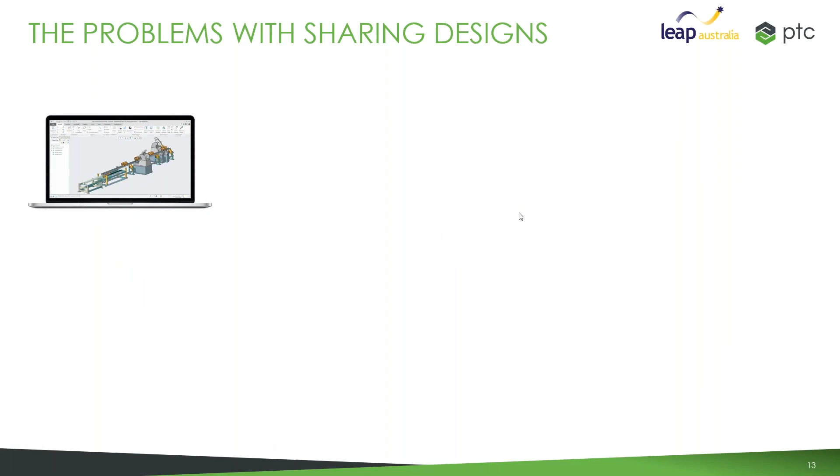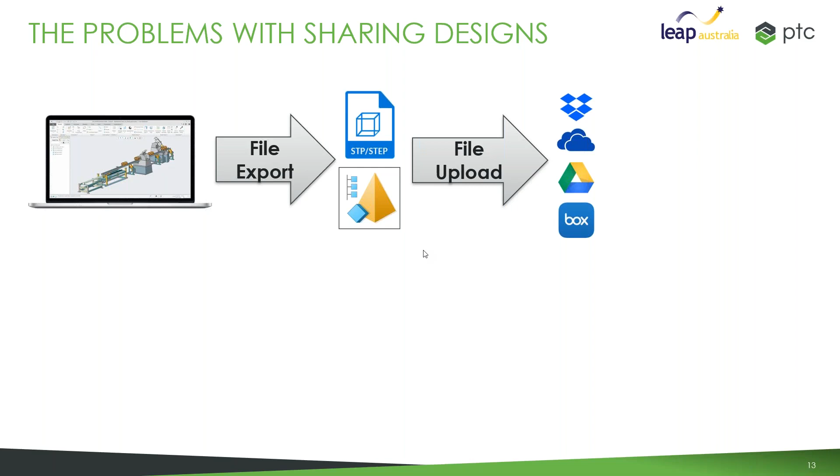So usually we start off with our 3D CAD. We're required to export this file out if someone wants to use it. And then we're faced with, well, what kind of file type do I actually need? We have to upload that file, whether we're using cloud services, local storage areas and so forth, and then eventually share that out to the individual that we want to have view this information.

So with that, we have to determine, well, can the end user actually view the file? Like numerous scenarios I've encountered where they don't have access to the software, they're not familiar with it, and you're spending a lot of time trying to troubleshoot issues that shouldn't really be there if you're just trying to get feedback on a design. And then there's things like IP.

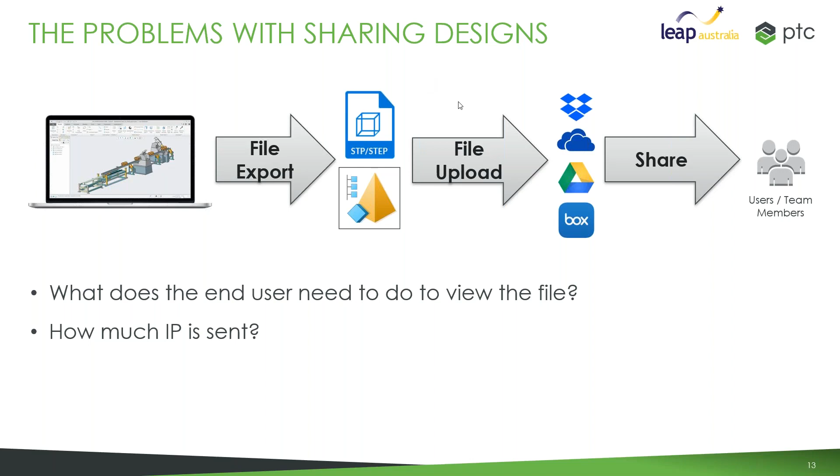So if we send out a 3D format, do we want them to have a physical copy of this file? So even things like a STEP file where it's pretty much stripped back from any model information, it still allows us to reverse engineer. We still can do measurements. We can still review a design and make judgment on it. So do we want to be sharing that out with people within our organization and outside of our organization?

And then do the end users actually understand what they're looking at? So there might be non-native CAD users. They look at something, they don't know how to manage the software or drive the software, and they don't get a full understanding of the context of it and how it fits into or how it should be used.

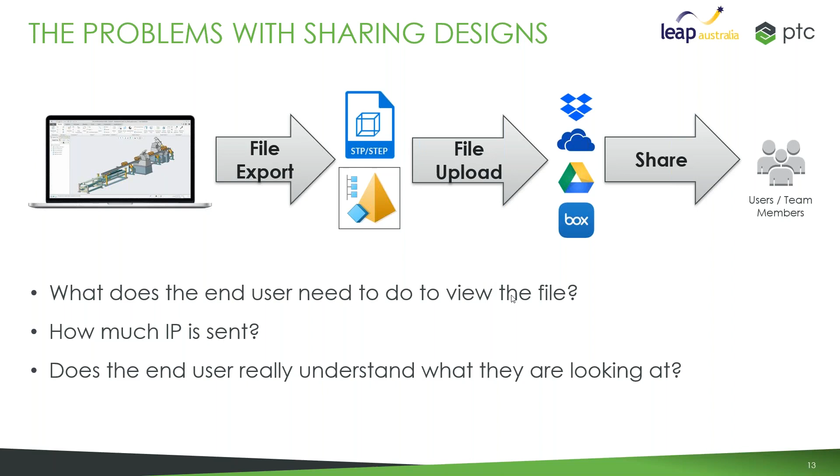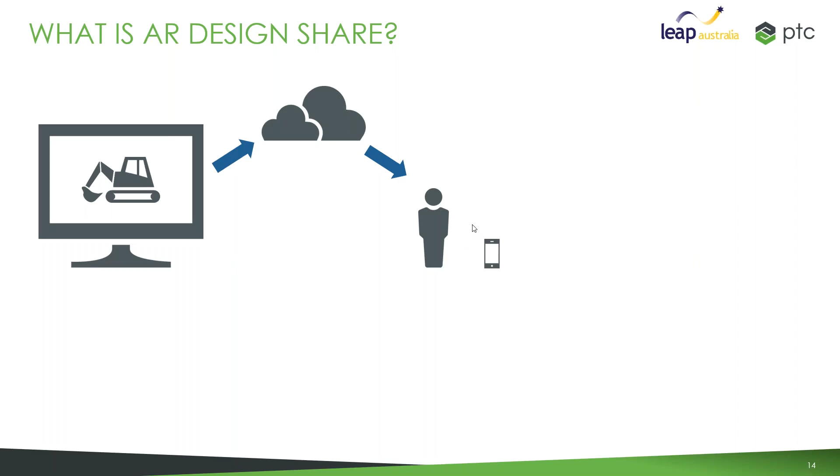So this is where something like AR Design Share can actually come into play. So we start off with our 3D CAD geometry, and we effectively publish this out to a cloud service. From that, we can share this to individuals to view on both their phones, tablets, or eyewear at one-to-one scale.

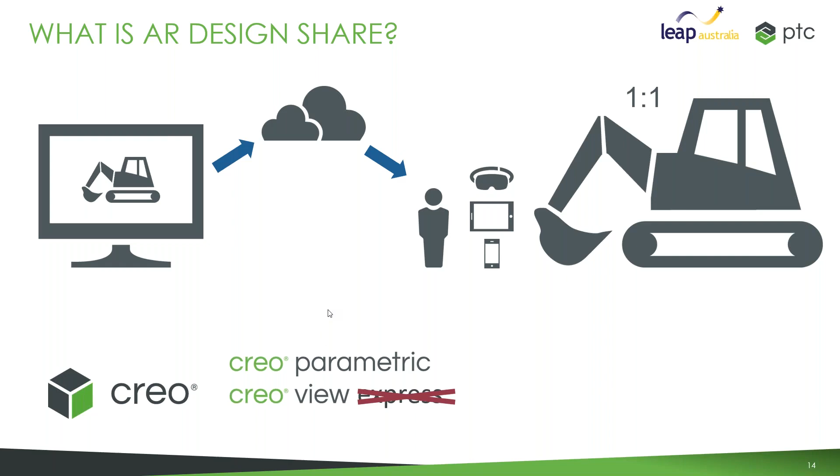So the important thing here is that AR Design Share is across the Creo suite. So effectively, we can use it within Creo Parametric itself. We can use it within Creo View in the Lite version, MCAD, ECAD, but not Creo View Express. So that's the free version that's available, as well as Creo Elements Direct. The other thing to note is it's also compatible with Windchill, so we can publish out straight from Windchill to share out these AR experiences.

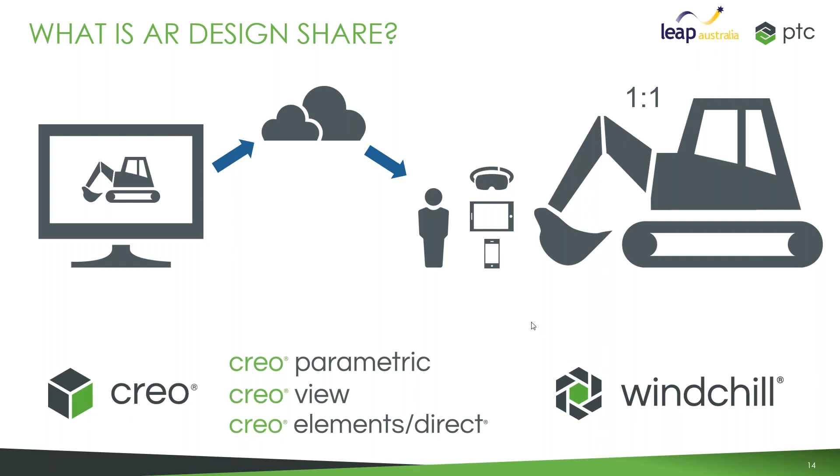Okay, so accessing AR Design Share from within Creo Parametric itself is simply within the ribbon. So we have to firstly define what's known as a model target, and we'll explain a bit more about that, and then we simply publish and we can go through and manage it.

So from here, it's very easy to quickly create and publish, distribute it, and then manage these experiences to make sure that the individuals accessing them are those that you wish to access them. Or you can make it public and then anyone with the QR code, URL link, etc. has access to it. So it allows for very easy and effective collaboration.

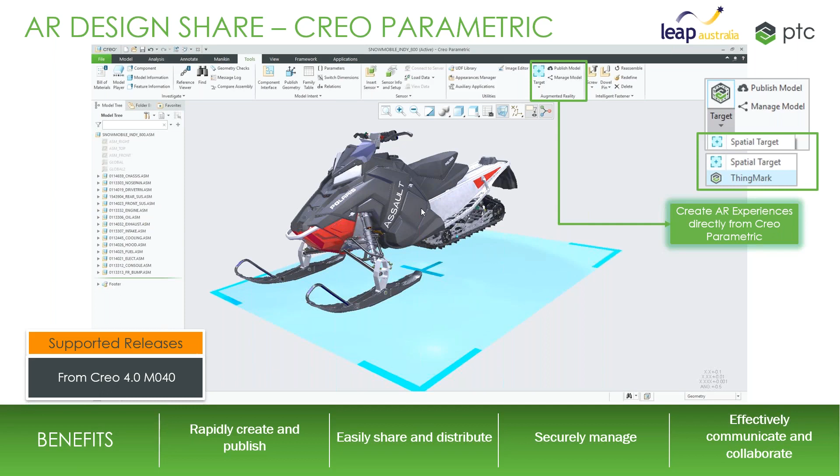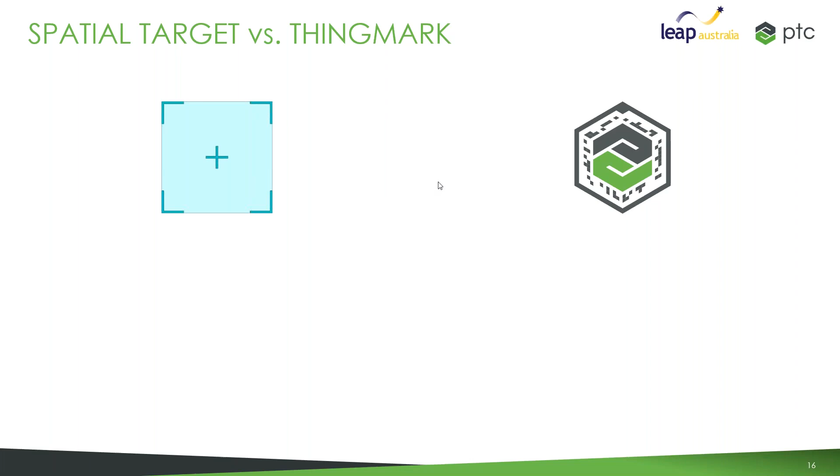So next thing is the two types of targets. So within Creo Parametric or AR Design Share, we actually have spatial and ThingMarks, each with their own pros and cons. So the idea is that a spatial target is used on a horizontal surface. It's used with a compatible device. So it's not really an issue in today's climate where technology is quite advanced, but we do see that in some scenarios.

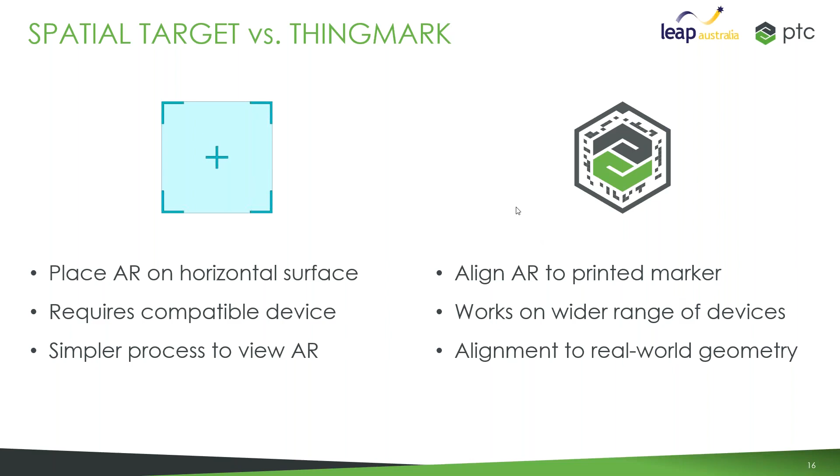ThingMarks are more used in applications where you might want to have it vertical on a wall. Because you have a physical marker, you can actually place that on a vertical surface and project your AR in that form. It's available to a wider variety of devices, and it also allows you to position your AR specifically in certain areas. Okay.

AR Design Share itself allows you to create up to 10 experiences. So this is in the out-of-the-box solution. There is also an enterprise edition, which gives you up to 50 experiences. There's two access modes, both public and restricted.

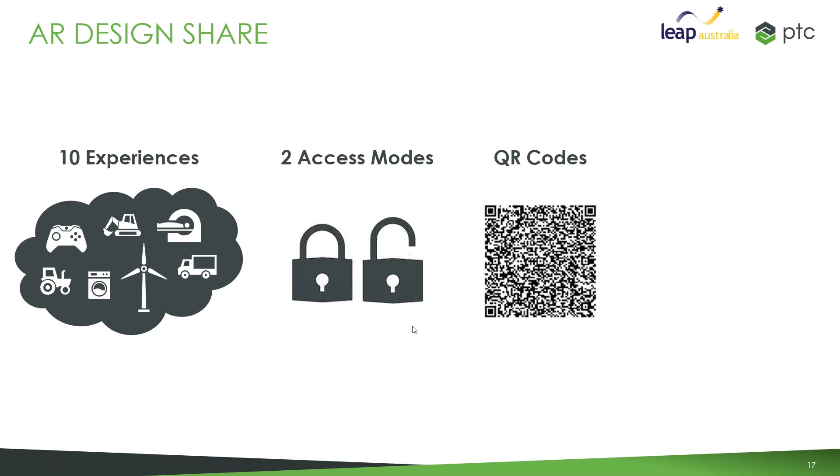So you can lock down who is viewing and who has access to this information, as well as distribution of QR codes, allowing you to view the experience within Vuforia View on any device, whether it's mobile, tablet, eyewear. And then lastly, the ability to use HoloLens, so wearable devices, to view the experiences.

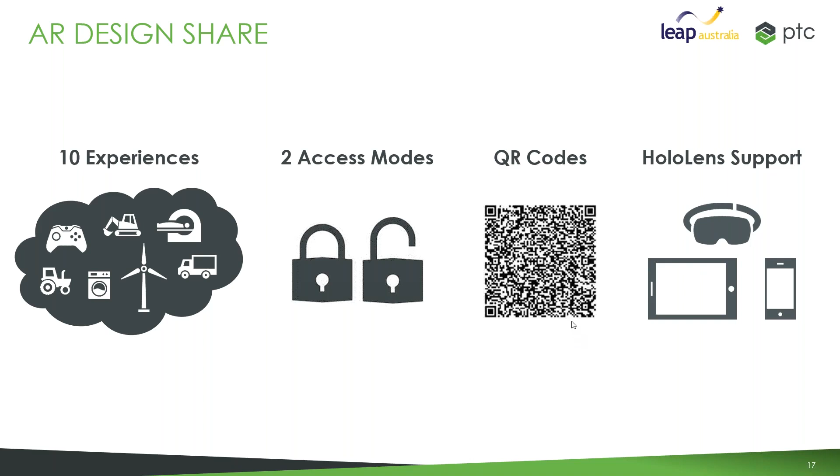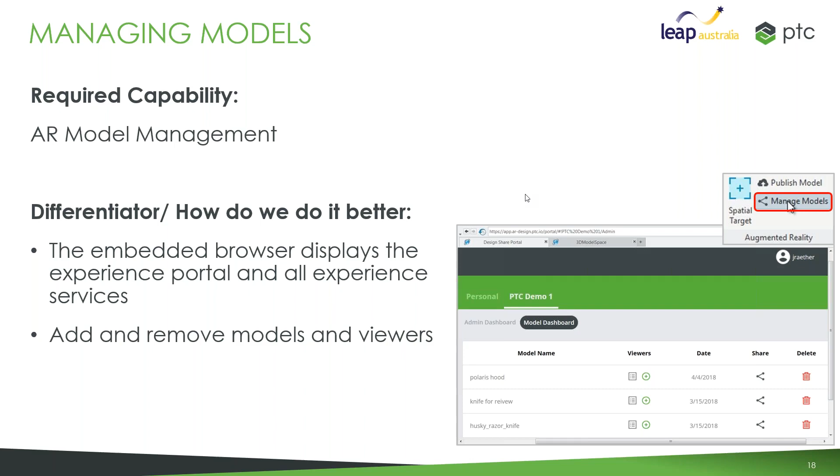So managing the models, we simply can go ahead and manage them depending on if we want to set certain preferences, we can go ahead, delete out information. So we can go through and essentially keep track of what experiences are logged within our system and then go from there.

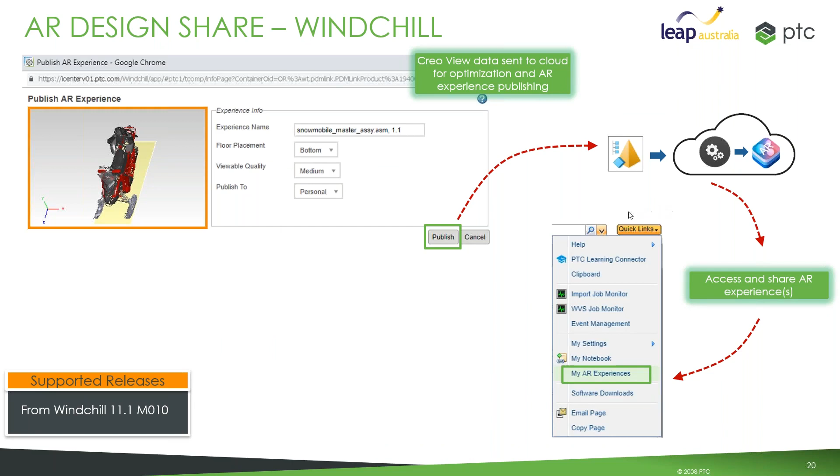Okay. So same thing within Windchill, simply using the actions dropdown. And then from there, we have this publish AR experience. We simply click on publish to publish it out to the cloud services. And then from there, we can manage it using the quick links dropdown, my AR experiences. So we can keep track of all of that right within Windchill.

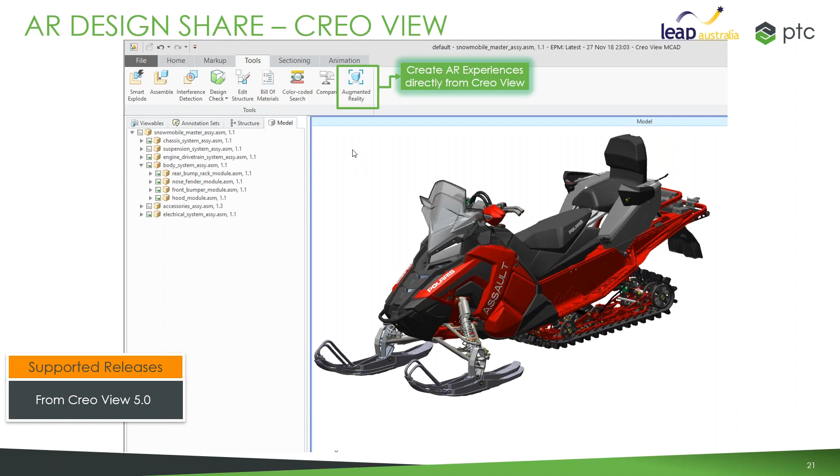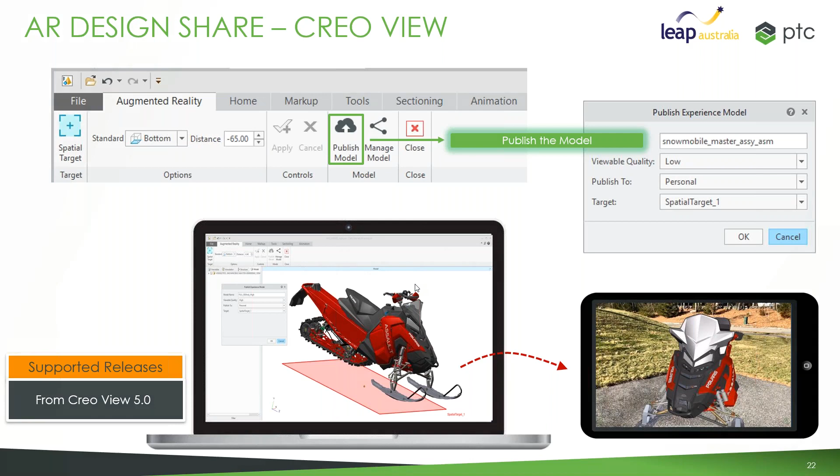And lastly, Creo View itself. So simple enough, same thing as Creo Parametric. Essentially the tools up in the ribbon, we're clicking on augmented reality, we define our spatial target and off we go, publish it out and we're ready to view and collaborate. Okay, so it's very quick and easy to go through this process. And what I'll do now is I'll just jump over into Creo and I'll show you a little demonstration of this.

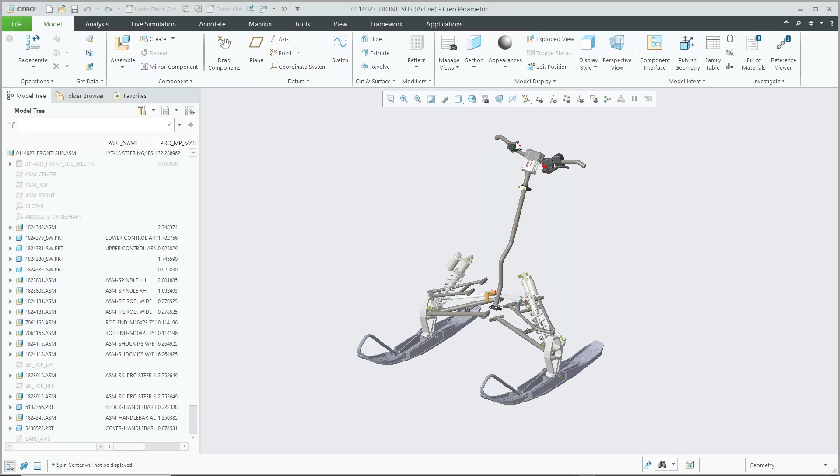Okay, so here we have the same model that we've been using across the webinar series. So this is a front suspension system from the Polaris snowmobile that you may or may not have seen in some Creo promotional videos and the stuff that we've shown over here at Leap. So what we want to do is click on Tools, define our target. So I'm going to use a spatial target, and then it's a matter of clicking Publish.

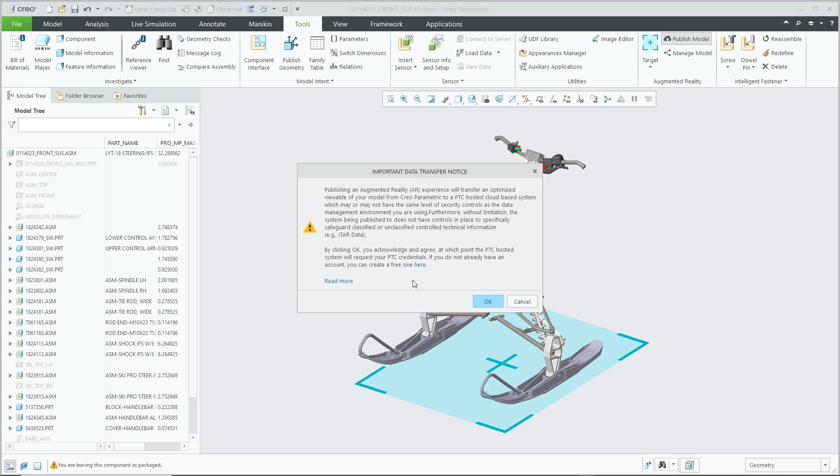So we have this pop-up, basically a disclaimer showing that once we publish our information, it's going to be housed on a PTC hosted cloud system. So this may or may not align with your security protocols within your organization. So just something to keep aware of. You also will need PTC credentials in order to publish this. So if you don't have one, you can simply click on the button shown here, and they'll take you to the landing page. You can fill out the form, and then you can start publishing out some experiences.

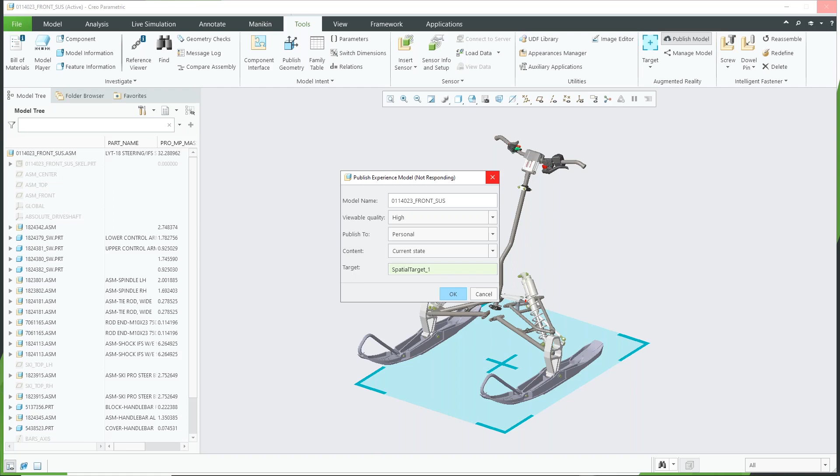So from there, it's going to get me to authenticate. Once I've authenticated, I can input some attribute information, whether it's the quality, where I'm publishing to, things like my name. I'm going to select on my target and publish it out. So we'll give this a second to load. And basically what it's doing is publishing out this information to that PTC hosted cloud service. And then after which, once it's finished, we'll jump into the Manage Model and we'll have a look at the finished experience.

Okay, so that has successfully published. So I'll jump over into Manage Model at the top, and we'll actually have a look at all the experiences that are published within my user account. So here we have front suspension. We can see things like spatial tracking or ThingMarks, and whether or not that's public or restricted. So what I'm going to do is actually share out this project.

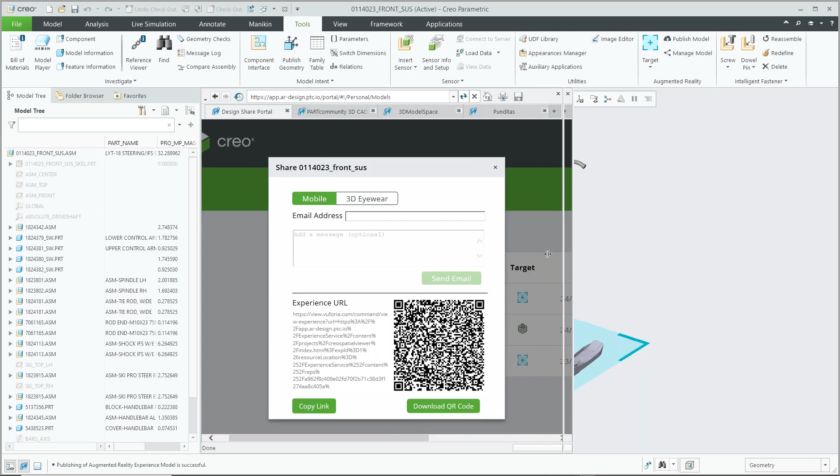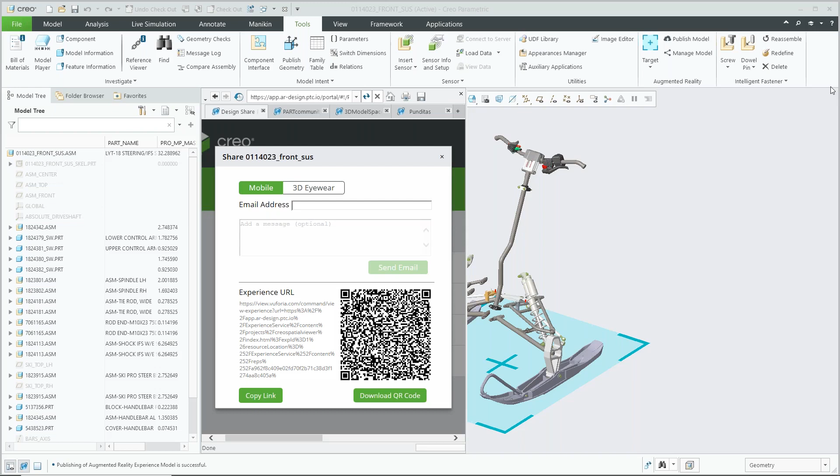I'll just minimize this. And for those of you that do have Vuforia View, you can simply scan this QR code. So what I'm going to do is bring up my phone. Just one second while it loads. Okay, so now this is essentially my phone. What I'm going to do is I'm going to hover over to my QR code, scan it. And then now it's going to ask me to position it on a flat surface. So I'm just looking at my desk, my mouse pad, and my design has been placed.

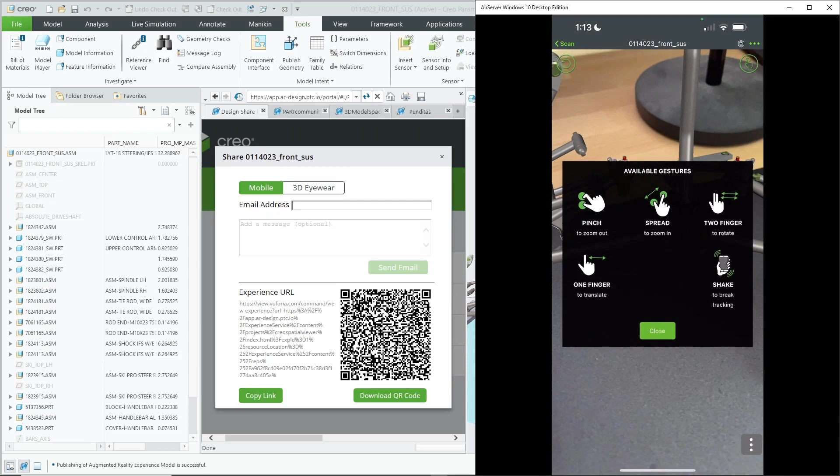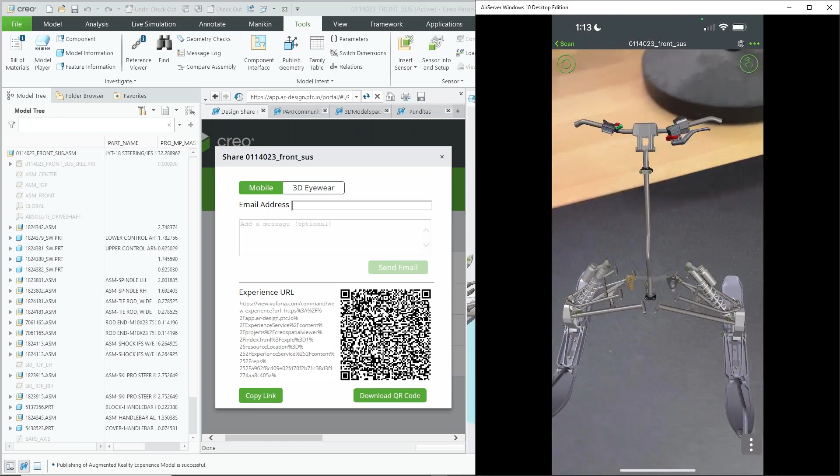So what you notice is that it's actually 1:1 scale, so it's quite large. We can actually use the available gestures within AR Design Share and Vuforia View to basically resize and position my AR experience. So I'll just shrink that down so it's viewable. We can now go around, from any angle. I can basically look into, I can highlight certain components and then hide them.

I want to get some more information to surrounding components. And then I also can reset the experience back to its original state, where it's 1:1 scale. So you have all that functionality right there within the AR. Okay. So that's pretty much the whole workflow of taking something from Creo Parametric all the way through to Vuforia View using AR Design Share.